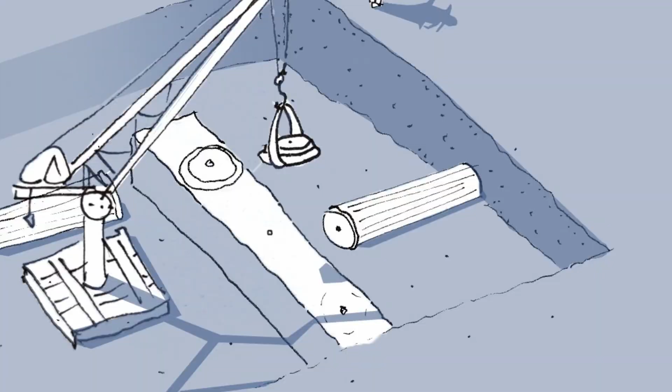Across thousands of years, 3 colossal stones, each heavier than a fully loaded Boeing 747, were somehow raised nearly 20 feet above the ground, forming the foundation of Baalbek's Temple of Jupiter. The textbooks credit Roman engineers, claiming wooden cranes and brute force did the job, but the math exposes something impossible. No Roman crane came close, and the telltale Lewis holes that mark their handiwork are missing entirely.

If modern cranes would buckle under the load, what exactly are we looking at, and why has mainstream history ignored these contradictions? The stakes are simple. Understanding how the Trilithon platform was really built means rewriting the origins of Western civilization as we know it. The real answer starts now. The numbers do not lie.

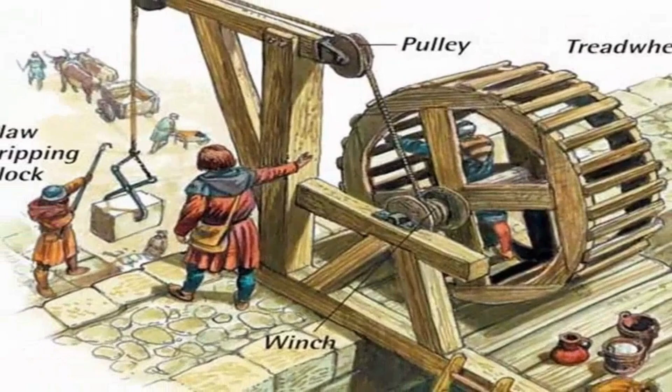The Roman Polyspastos crane, the pride of ancient engineering, had a maximum lifting capacity of 60 tons under ideal conditions, with flawless ropes, strong timber, and a full team of men at the capstan. That is not an estimate, it is the upper limit confirmed by ancient texts and modern reconstructions. The Trilithon blocks at Baalbek weigh roughly 800 tons each. 800 divided by 60 equals 13 1/3.

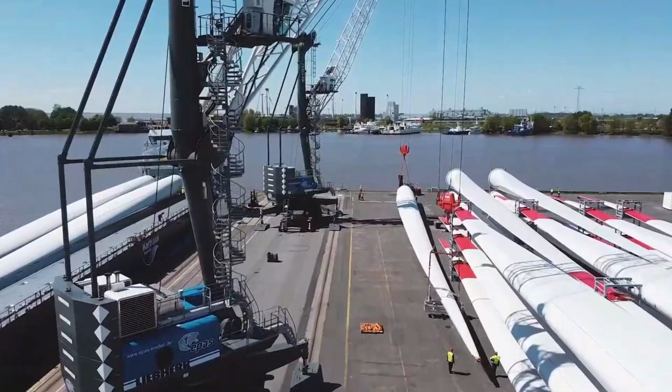Even rounding up, that means at least 14 full-sized cranes would be needed to lift a single block, assuming each crane could carry its theoretical maximum and the load was perfectly balanced across all points. Each Polyspastos was a massive piece of equipment, with a mast reaching 10 to 15 meters high and guy ropes that had to be anchored 10 to 20 meters out from the base for stability. In practice, every crane would occupy a working circle up to 30 meters across.

14 cranes operating side by side would require a continuous stretch of stable ground, each with its own anchor points and no interference between neighbors. The western face of the Baalbek podium, where the Trilithon sits, is about 60 meters long. Even spacing the cranes evenly along that wall would cram them together with only a few meters between mast feet. Their guy ropes would cross and tangle. Many anchors would have to be set beyond the terrace edge on sloping or unstable ground.

The platform itself is not a broad level field. The podium rises almost directly from the edge of a natural limestone terrace. There is only a narrow strip of workable ground before the terrain drops away toward the valley. There is no evidence of an engineered staging yard or a sprawling crane platform. Nothing suggests that the Romans prepared the ground for such an operation. Even the most generous engineering assumptions run into the same hard limit. There simply is not enough room for 14 heavy lift cranes, each demanding a 20-meter working radius to operate side by side in front of the Trilithon.

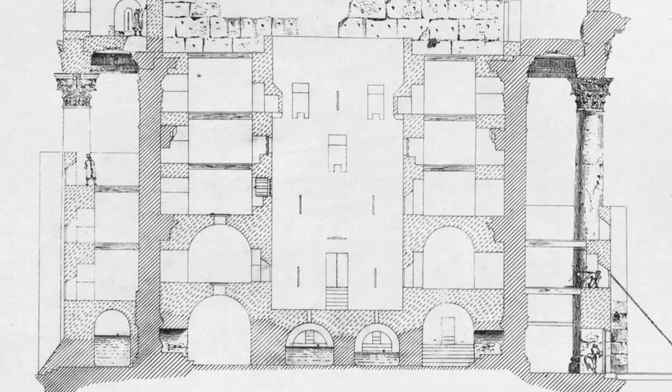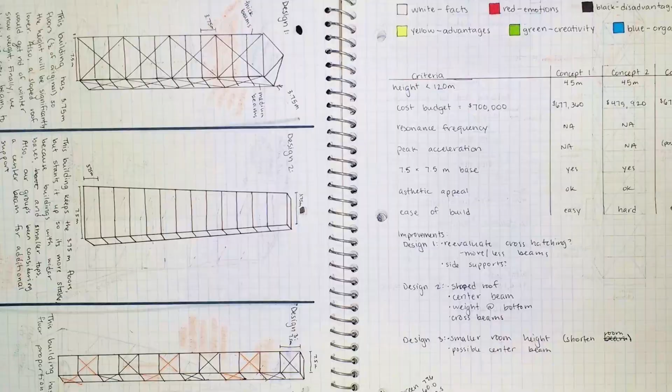This is not a matter of missing blueprints or lost technique. It is a question of simple physics and geometry. The load is too great. The space is too tight. The ground offers nowhere near the footprint required. Any claim that Roman cranes alone could have lifted the Trilithon stones must first answer the arithmetic. The numbers make it clear. The official story does not add up.

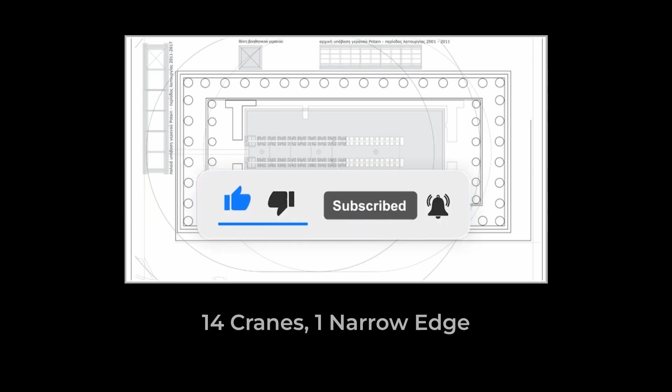A single glance at the site plan exposes the real problem. The western face of Baalbek's podium, where the Trilithon blocks sit, stretches about 60 meters from end to end. That is the full length available for any lifting operation. Now imagine trying to line up 14 massive cranes along that edge. Each one would be a towering structure, with a mast reaching 10 to 15 meters high, and guy ropes that need anchoring at least 10 to 20 meters out for stability.

Even the most conservative engineering models demand a working circle of 20 to 30 meters in diameter for each crane. Multiply that by 14, and the required space balloons far beyond what the site can offer. The ground in front of the Trilithon is not a flat field or a bustling Roman construction yard. It is a narrow terrace, hemmed in by the natural drop of the limestone bedrock. There is only a slim strip of relatively level ground before the terrain plunges toward the valley.

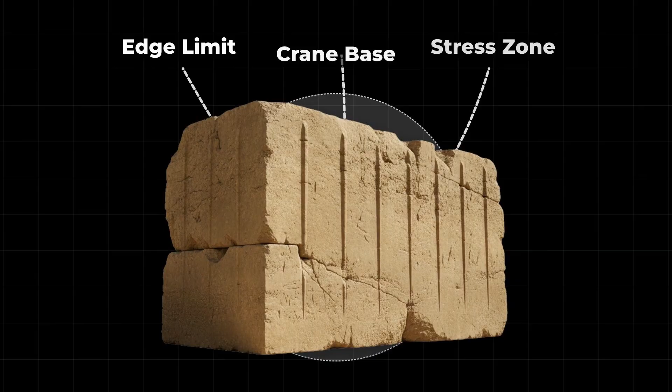Site surveys and modern three-dimensional scans confirm this constraint. The workable area is measured in single-digit meters, not the broad expanse a multi-crane operation would demand. There is no trace of a massive artificial platform, no evidence of a staging yard built out to support the immense weight and spread of so many cranes. Cranes of this scale cannot simply be squeezed together. Their guy ropes would have to cross and anchor into ground that does not exist.

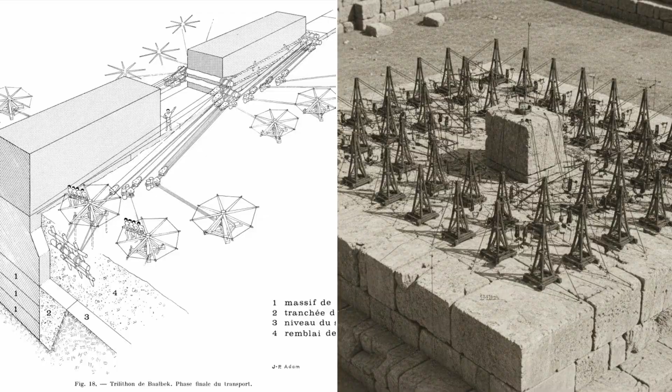Much of the rope would hang over a steep drop with no solid base for the anchors. Even if you tried to compress the spacing, the masts would crowd each other, the ropes would tangle, and the risk of catastrophic collapse would skyrocket.

The geometry is unforgiving. 14 cranes, each needing a safe working footprint, simply cannot fit along a 60-meter wall with only a few meters of stable ground in front. The physical reality on the ground turns the arithmetic shortfall into a spatial impossibility.

No archaeological trace supports the existence of a sprawling crane yard here. There are no post holes, no anchor points, no remnants of timber platforms or earthworks that could have supported such a dense array of giant machines. The site is what it has always been, a narrow shelf at the edge of the valley with the Trilithon blocks perched 6 meters above the ground, resting on another course of multi-hundred-ton stones.

The logistics of staging even a handful of heavy-lift cranes on this terrain are daunting. Staging 14 is out of the question. This is not a matter of missing blueprints or lost Roman ingenuity. It is a matter of hard limits, of physics, of geometry, of the landscape itself. The official story requires a fantasy construction site that simply is not there.

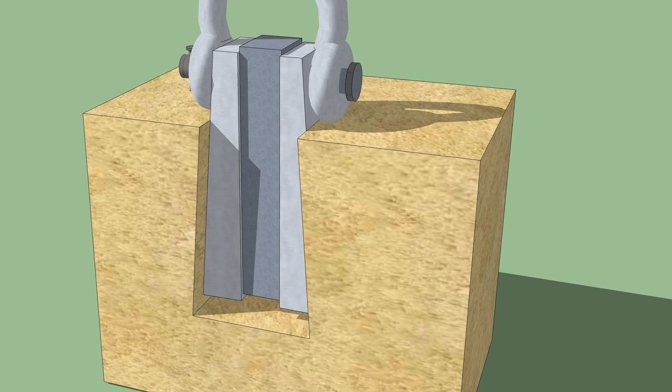Roman engineering left a distinct signature wherever it operated, and nowhere is that more evident than in the way heavy stones were lifted and set into place. The standard method relied on a specialized tool, the Lewis iron. This device worked by inserting dovetail-shaped iron keys into a precisely carved socket on the top of a stone block. When tensioned by a crane or pulley, the Lewis iron would grip the stone from within, allowing it to be hoisted vertically with control and safety.

These sockets are not random holes, they are geometric, often trapezoidal, cut specifically to match the iron profile. The system was so reliable that it became a hallmark of Roman construction from Britain to Egypt. At Baalbek, the upper layers of the temple, the columns, the architraves, and the decorative blocks display this method clearly.

Many of these stones, weighing from a few tons up to several dozen tons, show the telltale cut socket geometry on their upper faces. Even after centuries, these indentations remain visible, sometimes patched or filled after the block was set, but always unmistakable to anyone familiar with Roman techniques. The presence of these sockets is not just a technical detail, it is a kind of fingerprint proving that Roman cranes and Lewis irons were at work.

This pattern repeats throughout Roman sites. Whether in the Pantheon portico or the arches of the Pont du Gard, the Lewis hole is as Roman as the Corinthian capital. It is a baseline expectation. Where Romans lifted, the socket remains. The logic is simple: no socket, no lift. The next question then is whether this same signature appears on the largest stones at Baalbek's base.

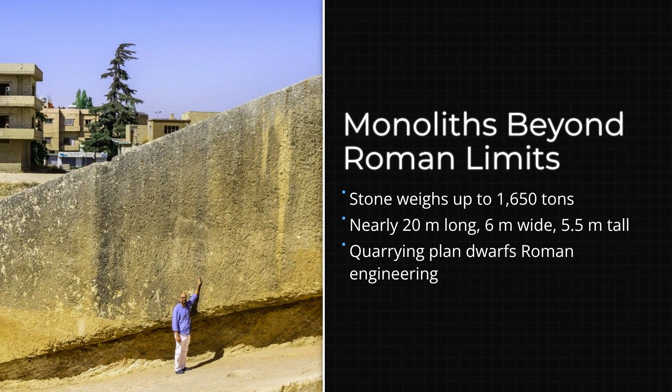Then, in 2014, a team from the German Archaeological Institute, led by Jeanine Abdul Massih, excavated beneath the famous block and revealed a second monolith still connected to the bedrock. Its dimensions are staggering, nearly 20 meters long, 6 meters wide, and 5.5 meters tall. The estimated weight is 1,650 tons.

No other stone ever cut by human hands comes close. This discovery rewrites the limits of what ancient builders at Baalbek set out to achieve. The Trilithon blocks at the temple podium, each weighing around 800 tons, already defy the known engineering of the Roman world. Yet the quarry proves the builders were not just capable of carving stones twice that size, they were actively preparing to move them. The unfinished state of the 1,650-ton monolith tells its own story.

It was shaped, measured, and separated on almost all sides, left attached only at the base, as if waiting for a final decision or a change of plan. The intention was clear. This stone was meant to be transported, not left as a monument to failed ambition. The quarry itself sits roughly 900 meters from the temple site, on slightly higher ground. The terrain is uneven, the distance considerable, and the logistics daunting.

But the existence of such a colossal block prepared for movement forces a reckoning with the scale of the project. This was not an isolated feat or a one-off experiment. The quarry output, an 800-ton Trilithon, a 1,000-ton Pregnant Woman, and now a 1,650-ton monolith, demands a level of organization and planning that challenges every textbook assumption about ancient construction. The numbers do not just impress, they overwhelm.

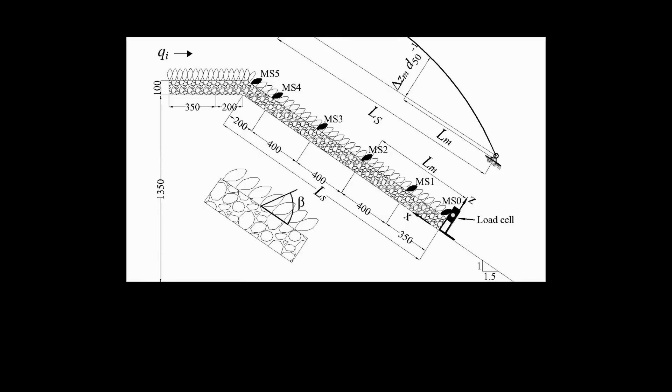That may sound gentle, but for an 800-ton block, even a slight slope turns the physics against you. On a downhill segment, the stone would accelerate uncontrollably. On an uphill segment, the force required to keep it moving multiplies. The favored academic model relies on timber rollers, thick logs, likely cedar or pine, lined up beneath the stone. In theory, these rollers, greased and pushed or pulled by capstans, would let the block glide forward. But the numbers tell a different story.

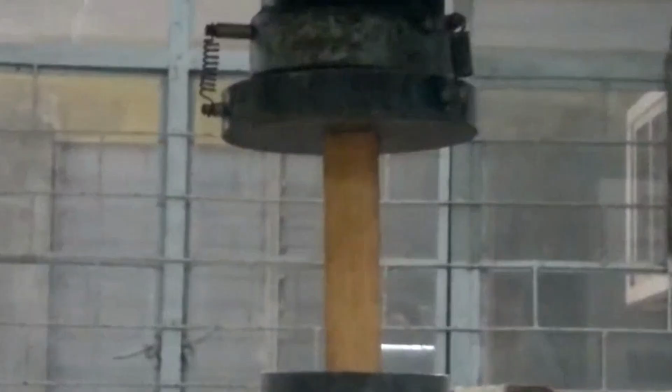Lebanon cedar, the best available wood, can handle about 4 to 8 megapascals of pressure across the grain before it starts to crush. With an 800-ton block spread across 10 rollers, each roller is subjected to pressures well above that threshold, often in the double digits. The wood does not explode, but it flattens and deforms, increasing the contact area until the pressure drops, but not before gouging deep trenches into any soft ground beneath.

Soil is the next weak link. On bare earth, the pressure under each roller is enough to turn the surface to mud.

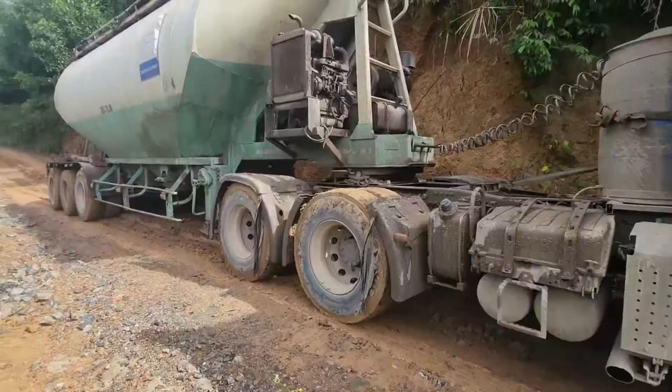Even compacted clay or gravel cannot withstand the repeated blows of a stone this heavy rolling over it. The result is immediate rutting. Rollers sink, friction skyrockets, and the entire operation grinds to a halt. Only a continuous rock-hard causeway cut into limestone bedrock or armored with heavy stone or timber mats could survive the assault. Over 900 meters, building such a track would rival the effort of carving the monolith itself.

Yet no archaeological survey has found evidence of a continuous engineered haul road linking the quarry to the podium. There are fragments of ramps and hints of prepared surfaces near the site, but nothing that matches the scale or durability required. The physics are simple. Without a specially built road, the roller method fails before it even begins.

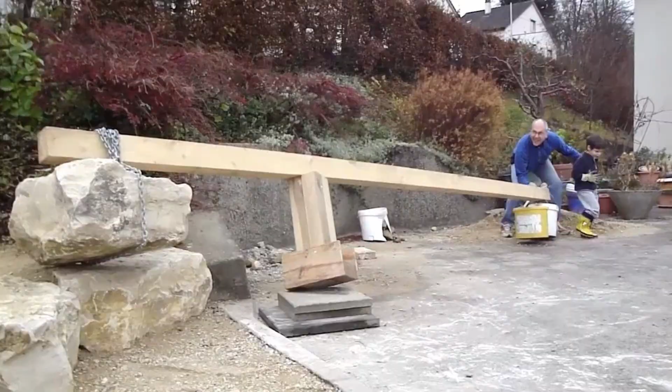The terrain at Baalbek is not a blank slate. It is a complex, uneven, and unforgiving surface. The absence of a surviving causeway raises a fundamental problem for the standard explanation. The ground would have swallowed the rollers whole long before the block reached the temple platform.

The weathering here is shallow, surface pitting, minor cracks, the slow abrasion of wind and rain. Nothing like the pronounced vertical erosion that defines the base. Photogrammetric surveys and on-site measurements confirm the disparity. Where the upper stones show millimeters of surface loss, the lower megaliths have lost centimeters, even decimeters in places. The contrast is unmistakable under direct sunlight. Bright, clean Roman stonework perched atop a foundation that looks ancient, battered, and almost geological in its erosion.

The vertical channels on the Trilithon blocks are especially striking after a rain, when water traces the same paths down the face, reinforcing the grooves cut by centuries of runoff. No mortar fills the joints between these stones. The fit is so precise that the seams are barely visible, even as the surfaces around them are worn and fluted. The Trilithon's weathering is not just a mark of age, it is a visual record, a surface archive, hinting at exposure far longer than the stones above.

This layered effect, the crisp Roman temple resting on deeply eroded megaliths, demands explanation. The evidence is right there in the stone, two histories, one on top of the other. The contrast between the battered megaliths at the base and the relatively fresh Roman stonework above is not just an aesthetic detail. It is a physical record of time. Deep vertical channels scar the lower blocks, while the upper courses, carved in the ornate Corinthian style, retain sharp lines and crisp ornamentation. Photogrammetric surveys and on-site measurements show the lower stones have lost centimeters, sometimes even decimeters, to erosion. In comparison, the Roman blocks above have weathered only a few millimeters. Their details softened, but not erased.

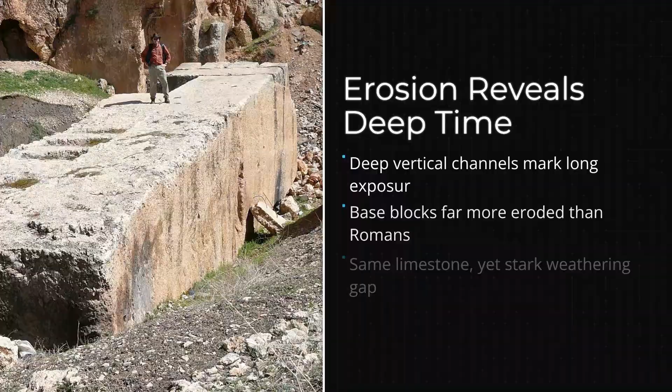For vertical fluting this pronounced to develop, the lower stones must have stood exposed for a far longer period, centuries, if not millennia, before the Roman temple ever crowned the platform. Mainstream archaeologists often attribute the weathering gap to differences in stone quality or local water flow. Yet geological surveys show both layers are carved from the same Cretaceous limestone, quarried within 1 kilometer of the site.

The only major variable left is time. If the base had been set at the same moment as the Roman superstructure, both should show similar degrees of erosion. Instead, the foundation looks ancient, almost geological in its wear, while the temple above still carries the marks of the chisel. The evidence is written in the stone.

Two histories separated by an invisible gulf of years. The lower megaliths bear the scars of an ancient age long before the Roman Empire, hinting at a forgotten chapter in Baalbek's story, one where the foundation predates the temple by far more than a single generation.

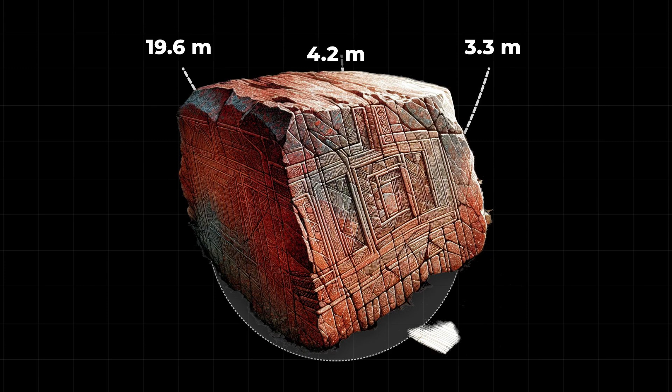Standing at the base of Baalbek's western podium, the mind grapples not just with the mass of the Trilithon blocks, but with their astonishing precision. Each limestone giant, nearly 20 meters long, 4 meters tall, and over 3 meters thick, rests perfectly on a bedding course of smaller but still massive stones.

The Trilithon is not on the ground. It sits 6 meters or nearly 20 feet above the valley floor, supported by a substructure that itself weighs hundreds of tons. This is not a pile of boulders. It is a deliberate, multi-layered platform engineered for stability and scale.

What sets the Trilithon apart is the way these blocks are joined. Along their seams, the gap is so fine that a needle cannot slip between the stones. No mortar, no filler, just limestone against limestone, locked so tightly that the joints are almost invisible even after millennia of weathering. Surveyors have measured tolerances down to fractions of a millimeter over lengths of nearly 20 meters.

The stones are not just close, they are aligned in 3 dimensions, with no measurable tilt or step between them. The platform's face runs straight and true, as if cut by a machine, not by hand. This level of precision demands an explanation.

The bedding layer beneath the Trilithon adds another layer of complexity. These supporting stones, each weighing 300 to 400 tons, were first set in place to create a level foundation. Only then could the Trilithon be placed on top, lifted or slid into position with such accuracy that the contact surface is almost seamless. It is a feat that demands not only immense force, but a mastery of geometry and load distribution.

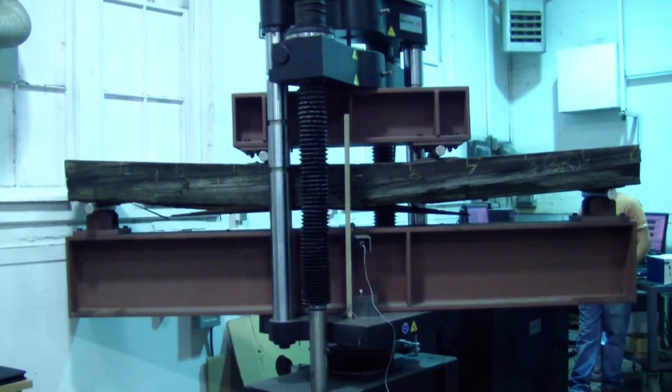To make a lever system work at Baalbek, the builders would need beams long enough and strong enough to survive the forces involved. Even the densest old-growth cedar or oak can only take so much before it splinters. For a block nearly 20 meters long and 4 meters high, a lever arm would have to be both immense and perfectly placed. The fulcrum, usually a stone or another beam, would need to be set in a socket or pit anchored deep into bedrock to avoid shifting under load. As the block is jacked up, cribbing, stacks of smaller stones or timbers, would be inserted underneath, raising the block in increments.

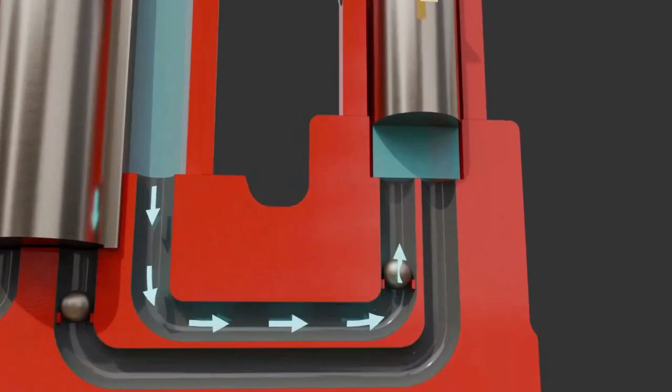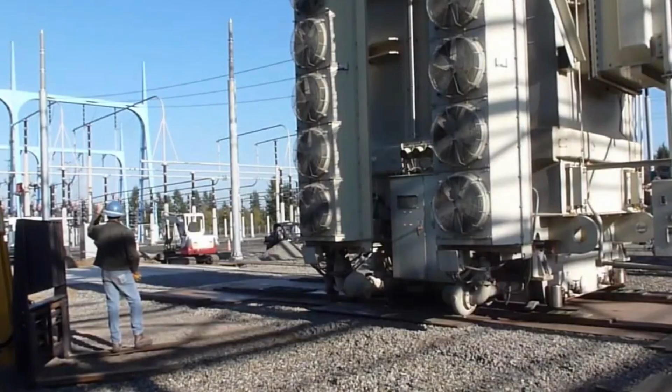Over many cycles, the stone could be lifted to podium height. In theory, a crew could repeat this process inch by inch until the block reached the required elevation. This method is not just a thought experiment. Modern heavy riggers use similar techniques for moving transformers and bridge spans, albeit at a much smaller scale.

The real question is not whether it is possible in principle, but whether there is any trace of such an operation at Baalbek. Archaeologically, lever systems leave a distinct footprint: anchor sockets carved into bedrock, post holes for timber supports, counterweight pits, and wear marks where beams pivoted under load. At Baalbek, no such features have been documented in published surveys around the Trilithon. The podium's edge is clean, the terrace shows no obvious anchor pits, and the ground in front of the wall bears no sign of massive lever operations.

It is possible that later construction, soil movement, or simple erosion erased these traces. Timber, unlike stone, leaves little behind after centuries. But at other ancient sites, for example in Egypt, lever sockets and anchor points are often preserved even after thousands of years. Their absence at Baalbek does not prove the method was never used, but it does mean the evidence

is ambiguous. For the practical skeptic, the lever remains a testable hypothesis, simple, scalable, and grounded in physics. But without the physical signatures, anchor pits, fulcrum scars, or counterweight foundations, the lever solution is still waiting for its smoking gun. Speculation fills the void where hard evidence runs thin. When the math rules out cranes and the terrain defeats rollers, the search for answers turns to the margins of

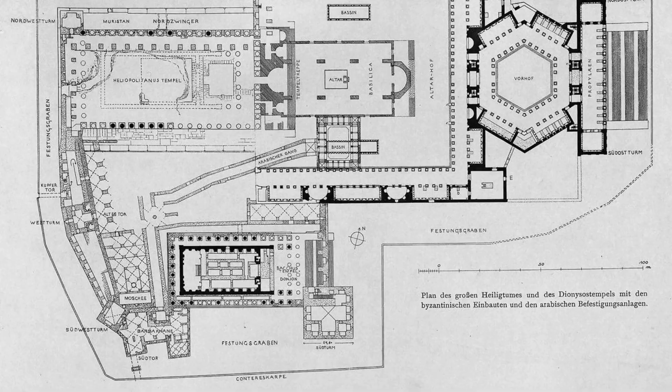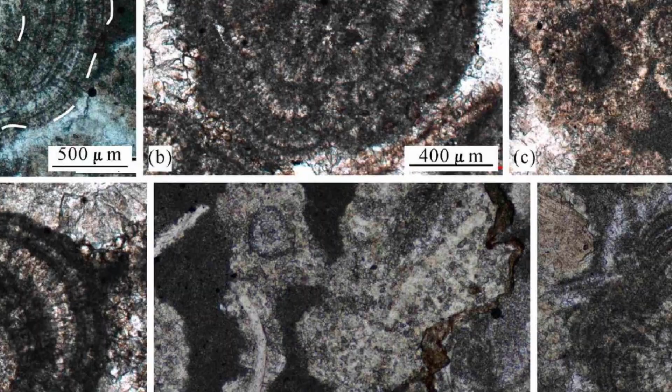But so far, thin section petrography and chemical analysis of Baalbek stones show the microstructure and fossil content of natural Cretaceous limestone, not an artificial mix. No trace of chemical binders or casting layers has been found. Without this evidence, the geopolymer hypothesis remains unproven, a technical possibility, but not a demonstrated fact at Baalbek.

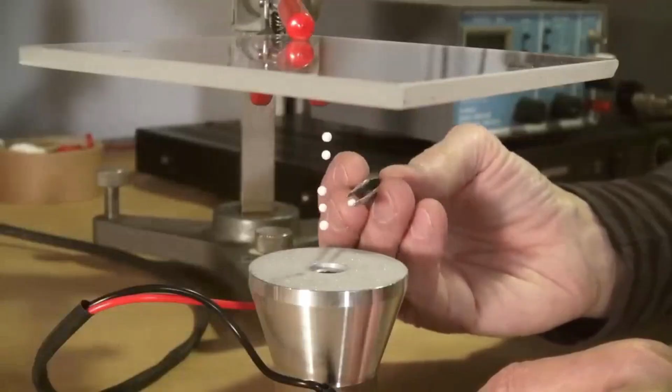Other ideas drift even further from conventional engineering. Some propose that the builders harnessed resonance or sound, acoustic levitation, to move the stones, citing legends of lost knowledge and the silence of the archaeological record. No ancient texts describe such a process, and no experiment has ever demonstrated the lifting of multi-ton blocks by sound alone. These concepts remain thought experiments, untestable at present and unsupported by physical traces at the site. Acoustic theories are intriguing, but they require extraordinary evidence.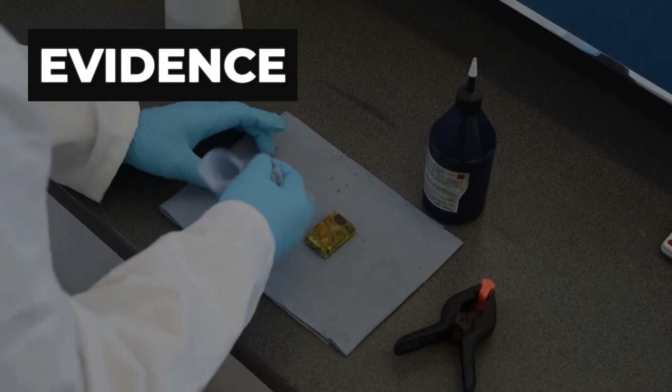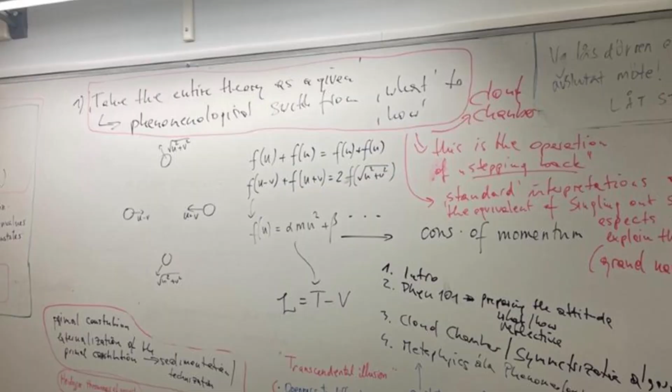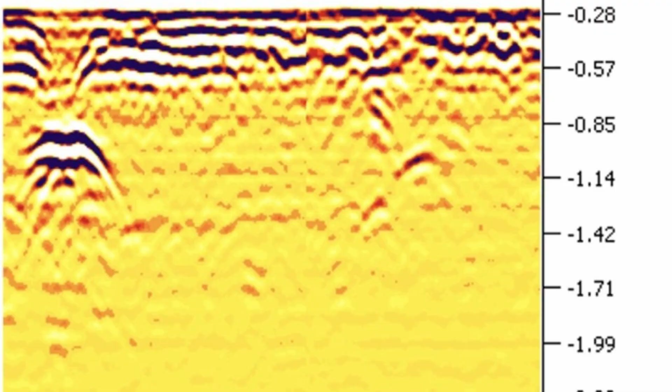The lever and crib method remains the most plausible mechanical solution, but as already shown, the absence of anchor pits or fulcrum scars at Baalbek keeps it in the realm of hypothesis. The lack of direct evidence is not proof of absence, but it does leave the door open for further research. What can be done now is clear. A systematic program of high-resolution petrographic analysis, ground-penetrating radar along the quarry to podium route, and targeted excavation at the podium margins could reveal hidden roadbeds, compacted layers, or anchor points, signatures of lost infrastructure or techniques.

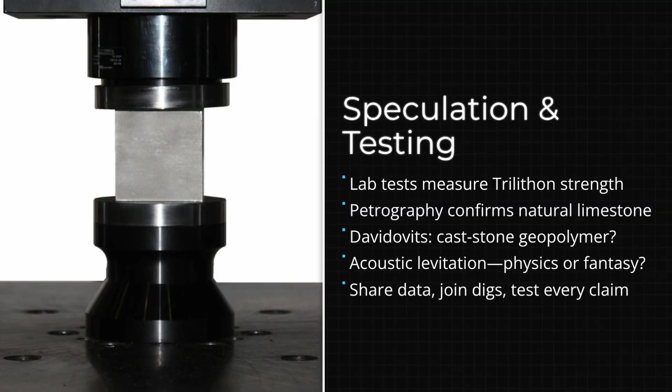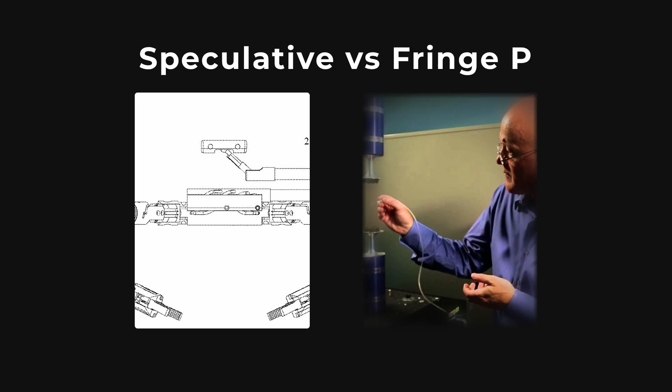Laboratory experiments to test compressive strength and microstructure of the Trilithon blocks, searching for signs of casting or unusual composition. Digital simulations using finite element modeling to stress test every proposed method, from multi-capstan jacking to hypothetical acoustic lifting under realistic conditions. Field surveys and targeted trenches along the quarry route and podium margins to look for engineered causeways or

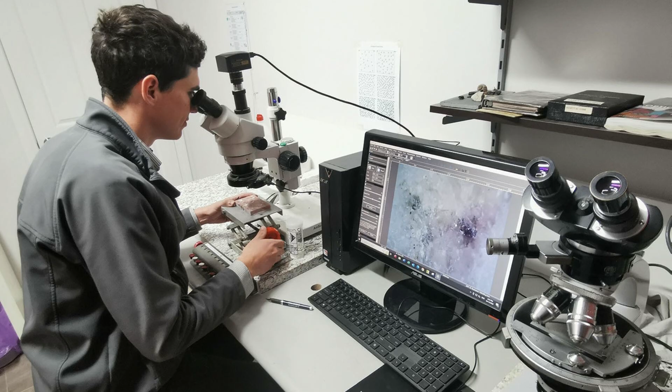anchoring features. The evidence checklist is simple: chemical binders in the stone, radar traces of engineered causeways, tool marks or sockets in the podium, and experimental replication at a meaningful scale. Each testable claim invites the technical community to weigh in, not with speculation, but with data. The mystery of Baalbek will not be solved by stories alone. It demands measurements, experiments, and the courage to follow the results wherever they lead.

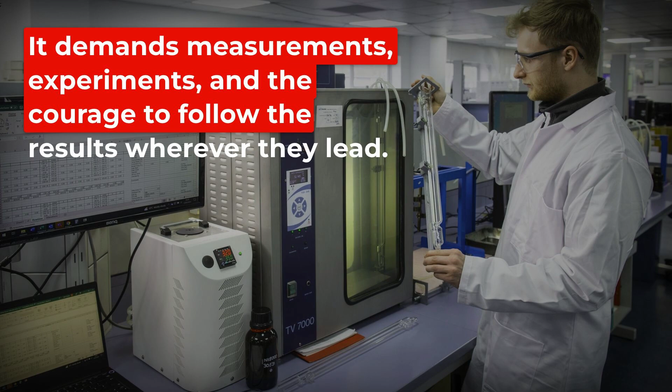If you have access to lab equipment, ground-penetrating radar, or digital modeling tools, the next breakthrough may come from outside the academy. Post your findings, challenge the assumptions, and help turn this ancient puzzle into a modern engineering case study. The future of this question belongs to evidence.

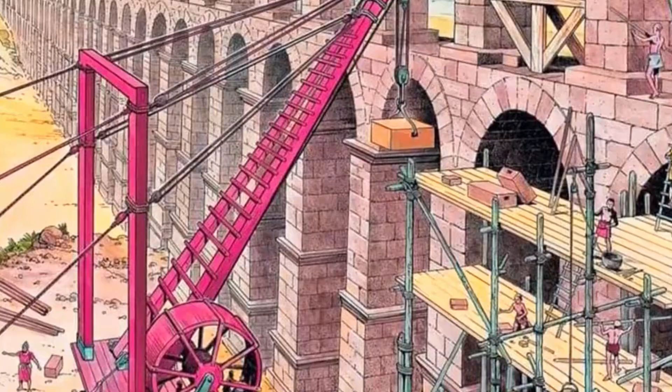Today, Baalbek's Trilithon stands as a physical equation history cannot solve. They are three 800-ton stones that outstrip the limits of ancient and modern lifting technology. As new discoveries upend what we thought we knew, the site reminds us that not all human achievements fit our narratives. The real mystery is not who built it, but how much knowledge we have truly lost. Sometimes the foundation beneath us is older than the stories we build on top.